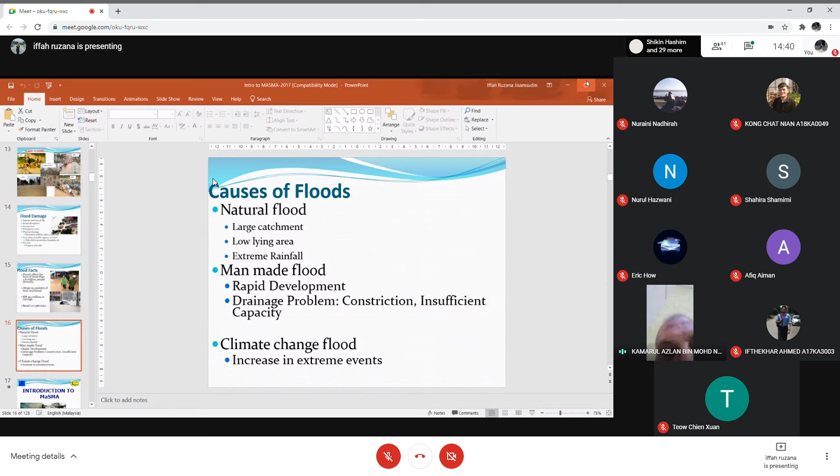Okay, so introduction to MASMA. This manual is in Malay actually. MASMA stands for Manual Saliran Mesra Alam, or environmental friendly drainage manual. Basically this manual provides guidelines on how to conduct our development so that it can be sustainable. For this class you need to refer to MASMA for your design.

For example, you need to design a temporary earth drain and the sediment basin. For all this you need to refer to this manual. You can get it from the JPS site, the Department of Irrigation and Drainage, and download it for free. It is readily available. So basically, what is MASMA? Next slide.

What is MASMA? An overview, and this is the second edition of the manual. The first manual was published in 2001 and the second edition in 2011. Ten years after the first edition, the Department of Irrigation and Drainage upgraded the manual to the second edition, improving some topics and dropping others based on feedback from users of the first edition. Next slide, please.

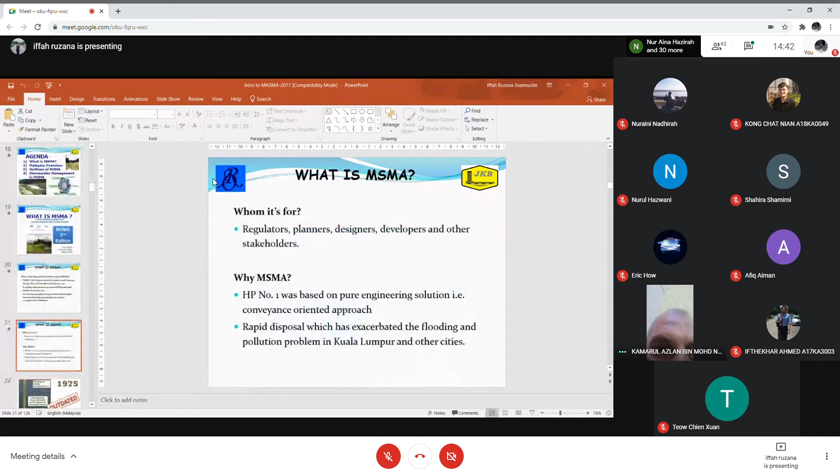So basically this new drainage manual is to replace the old manual, which is outdated because the approach is different. The previous manual's approach was based on rapid disposal and hard engineering, but the new manual is based on control at source. In the first edition, the urban stormwater management manual, the concept is control at source, whereby we try to control the problem at the site, not pass the problem to the downstream area. Next slide.

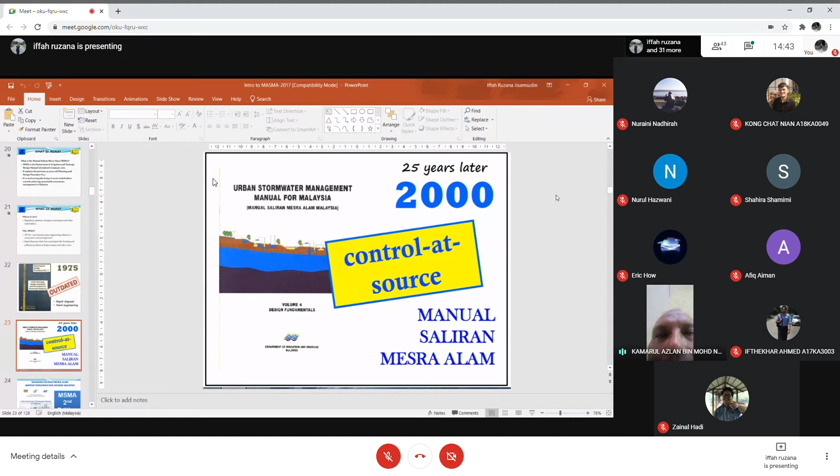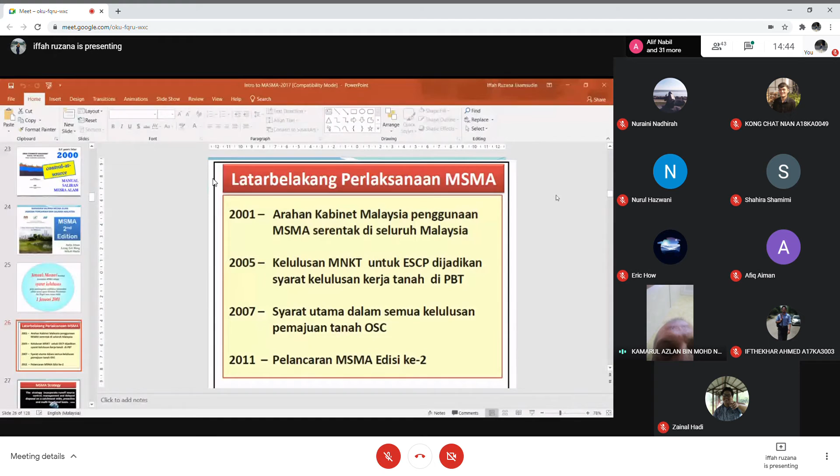This is the cover for the second edition manual. Next slide. The historical fact is that the first manual was endorsed by the minister in 2001. And then, as you can see, the second edition was launched in 2011. Next slide.

The drainage manual strategy is to incorporate surface runoff control, management and delayed disposal. So the strategy is how we can control the surface runoff, manage it and delay the disposal. For example, during a heavy storm, we store the water in a pond, and later release it gradually after the rain. So basically that is the strategy.

Okay, so we don't want to release the water as soon as possible, like in the concept in the earlier manual, the 1975 manual. That is more on rapid disposal. Okay, this should result in flood flow reduction.

So based on this strategy, we can achieve a few objectives, such as flood flow reduction, water quality improvement, so our river water becomes cleaner, and ecological enhancements. Okay, so basically we improve the water quality, and therefore the water becomes clean, and we can attract more fishes to come to our river.

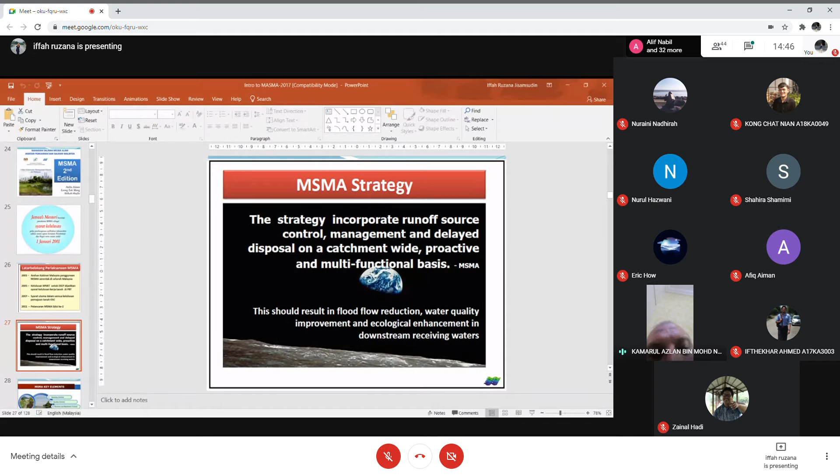But in our urban rivers, normally the fishes are not of that high quality. For example, we have this mudskipper, and other fishes that are not very expensive actually, because they're not very high quality fishes. But that is the purpose. We try to bring back this better quality, so that we can bring back the fishes into our streams and rivers. Okay, next slide, please.

Okay, there are a few key elements within MASMA, the manual. One is quantity control, the other is quality control, and the third one is erosion and sediment control. So basically, the three main components of this MASMA drainage: quantity control is to control the surface runoff. The quality control is to remove all the pollutants, such as gross pollutants, such as plastic bottles, food waste, food containers and so on from our rivers, so that our rivers can look very clean.

Okay, so if you happen to be in Malacca, you can try the river cruise. You can see the river is becoming cleaner over the years, because it used to be quite dirty, but the effort from the state government to improve the river water quality has borne fruit, and the river is quite clean nowadays, except that at certain stretches there's a bad odor. Okay, so that comes from the direct discharge from households, but that has been taken care of also.

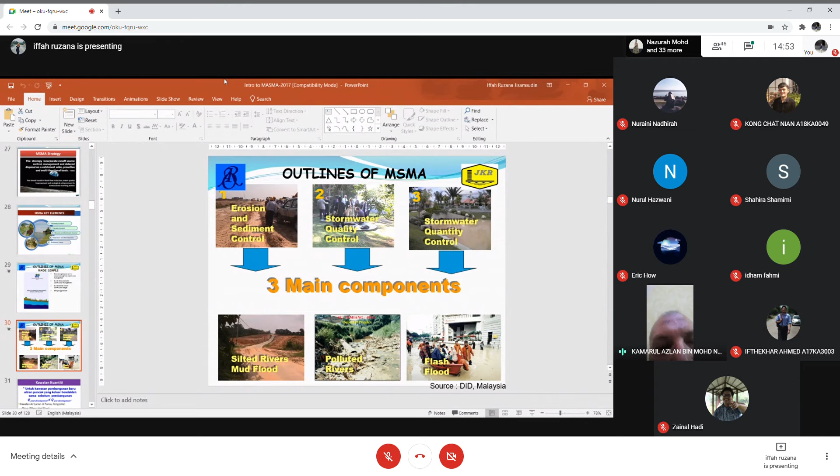Okay, that's about it. Okay, next slide. Next slide.

Okay, so as you can see, this is kawalan kualiti or quality control. So during construction, we have to propose some BMPs such as silt fence, as you can see in the lower left-hand corner. So that is the picture of a silt fence. We propose this in our construction site to prevent erosion or sediment from leaving our construction site. And then to filter out the sediment, we introduce a check dam. So the middle picture is a check dam where we gather rocks and arrange them in such a way that we can reduce the velocity and filter out the sediment.

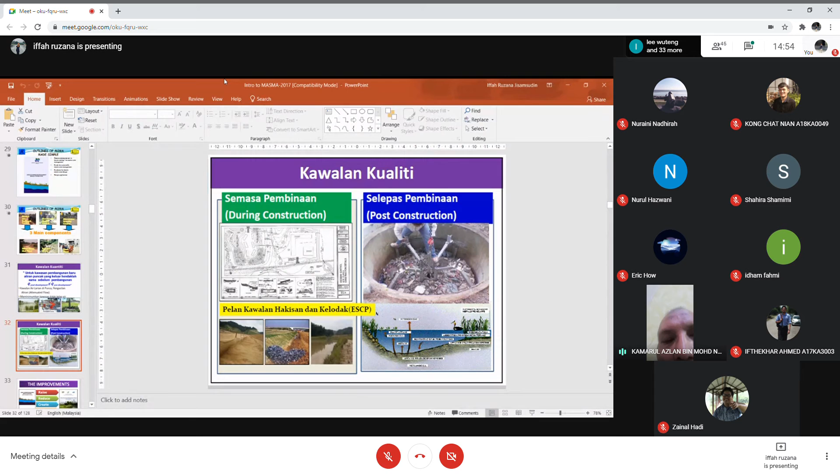And finally, the third one is the picture of a sediment basin. The purpose of this sediment basin is to filter out or to allow the eroded material to settle within the sediment basin. Okay, next slide.

Next slide, please. Okay, this is just an additional topic on the difference between the new manual and the old manual, the second edition and the first edition. Okay, just forget about it. So we finished the topic on the introduction to MASMA.

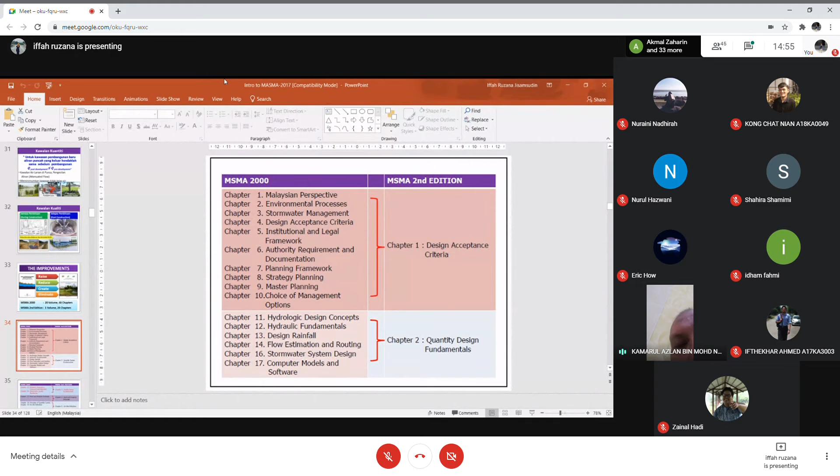Okay, okay, okay. Okay, never mind. Leave it. We go out and then we open the other slide. The other topic, soil loss slide. Okay. Okay.

Soil loss estimation. So this topic will cover the estimation of soil loss from a construction site. Okay, next slide. So basically, we have to know what is erosion and what is sedimentation, because these are the main causes of the problem. So once we identify the causes of erosion and how to prevent it, then only can we prescribe the right solution or the right medicine to our problem.

So basically, what is erosion? Erosion occurs when soil particles are displaced by raindrops, moving water, or wind. So this is basically what erosion is. Erosion occurs when the soil particles are displaced by raindrops. What happens is that when the raindrops drop on the surface of the earth, it breaks the bond between the soil particles. Why does it happen? Because there is no cover to protect the soil from erosion.

So whenever we want to do development, the first thing we will do is remove all the trees, the grass, the shrubs, the bushes, and so on. Once we remove all these, the soil is without protection, because all this while, the trees, bushes and shrubs provide protection for the soil. But once we remove them, there is no more protection to the soil.

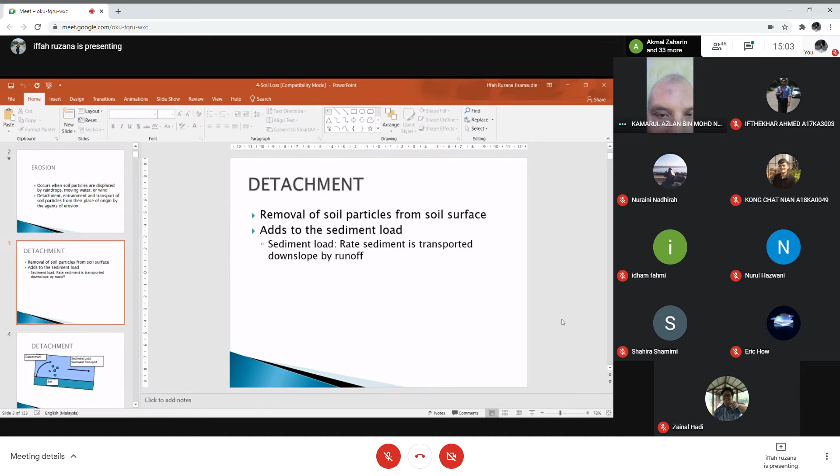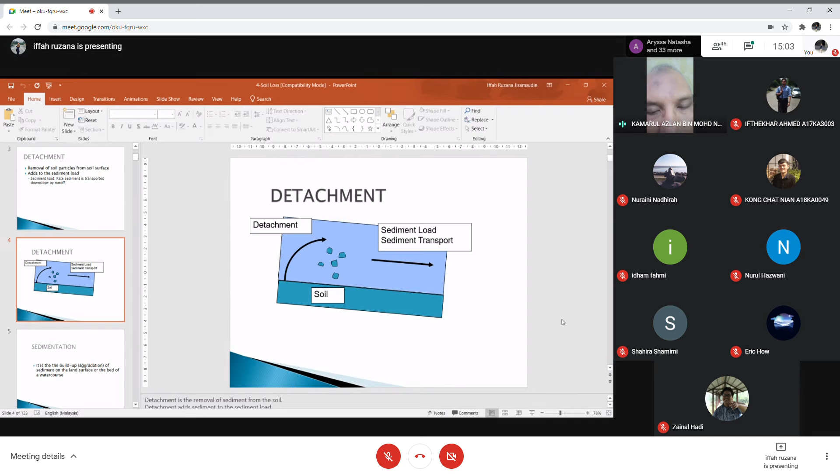So this is the graphic description of the process of detachment. Detachment is basically the loosening of the soil particle, and then the surface runoff transports it and it becomes sediment load. Next slide.

What is sedimentation? When we have erosion, then we have sedimentation, because with erosion the soil is eroded and then transported downstream. Whenever it settles down, that is what we call aggradation. Aggradation of sediment means an increase in the amount of sediment at that place due to siltation or sedimentation.

When does sedimentation happen? It happens when the transport capacity of the flow, or the velocity of the flow, becomes less, because sediment also has its density. When the density or the settling velocity is higher than the transport capacity, the sediment will be deposited at that area.

So where will this sediment be deposited? It is normally deposited when the velocity of the flow becomes very low. For example, near a check dam, in front of a culvert, in a sediment basin, and so on. Basically, it's the build-up or aggradation of sediment on the land surface or the bed of a watercourse. Next slide.

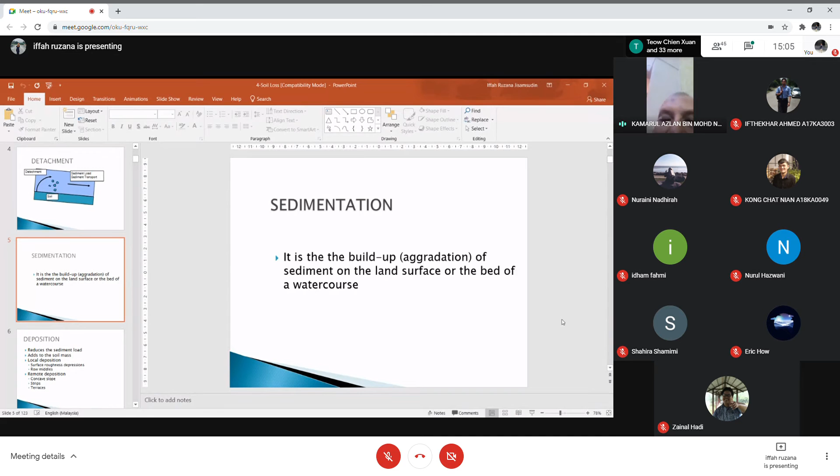Basically, deposition is when they deposit some of the material, so it reduces the sediment load. For example, whenever the material is eroded and transported, the material is not uniform. Some of these materials or the soil are quite dense, for example, sand. Sand is denser than silt or clay. So whenever the velocity reduces a little bit, this heavy material will be deposited the earliest, and then the lighter material will be deposited later when it comes

to the sediment basin or check dam, and the very light material sometimes will not be deposited, because the density of the material is less than the density of water. Therefore it cannot be deposited unless it clumps together. That's why in certain cases when we have a lot of this clay material, how can we deposit it when it is very light?

So we add some chemical coagulant to remove some of these static charges, so that allows the clay material to clump together, become bigger, and only then become denser. Then only it can be deposited. So you have to add chemicals like coagulant, polyacrylamide, and so on, to allow this clay material to clump together and be deposited. So basically, deposition adds to the soil mass.

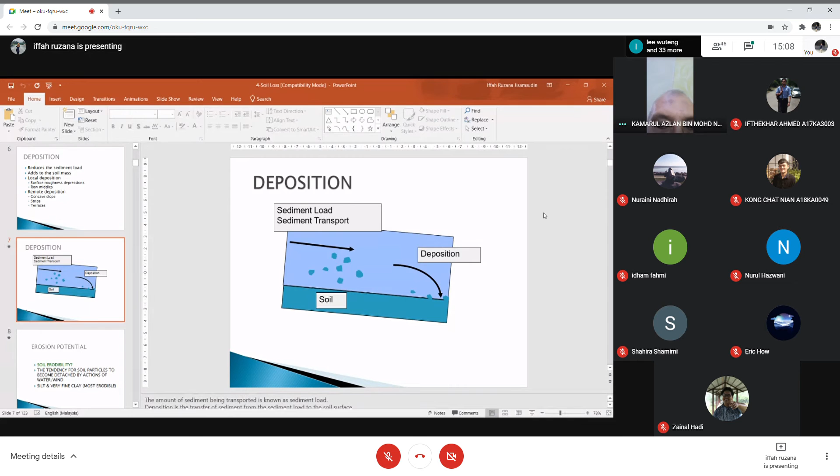What are the erosion potential? What are the factors that influence erosion rate? One of the main factors in erosion potential is soil erodibility. What does soil erodibility mean? Soil erodibility means the tendency, how easy it is for soil particles to become detached by the action of the agent of erosion. So how easily the soil can be eroded.

Of course, different types of soil will have different erodibility factors. So which one is much easier to be eroded, sand or clay material? Which one is easier to be eroded, the soil type of sand or the soil type of clay? Anyone? Sand. Salah, wrong. Clay.

As you can see, right below it, silt and very fine clay is the most erodible. So the finer the material, the easier it can be eroded. As you compare sand, which is much coarser, to clay, which is very fine, clay is a lot easier to be eroded compared to sand. Similarly, silt is somewhere in between sand and clay. Next slide.

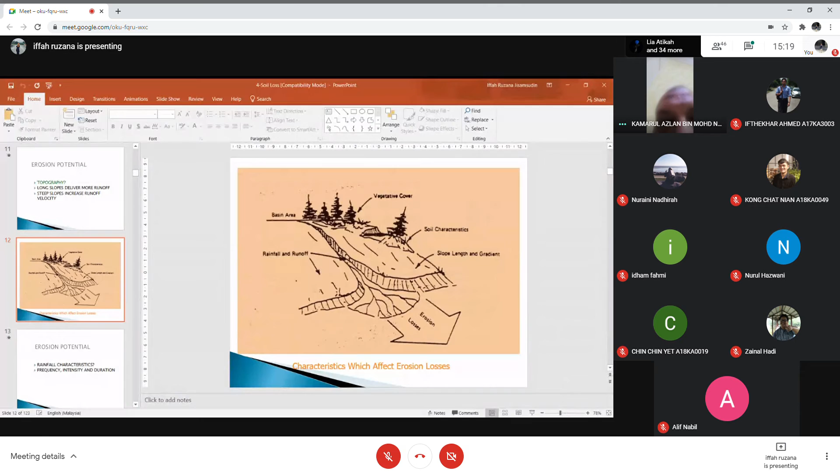Next slide. And the other parameter which can influence the rate of erosion is the erosion potential, such as rainfall characteristics. What are the rainfall characteristics? The rainfall characteristics are the frequency of the rainfall, the intensity of the rainfall, and the duration of the rainfall.

Okay, the frequency - what does it mean by frequency? What does it mean by rainfall frequency? It's the number of rainfalls that happen in a period of time - how frequent is the rainfall. In Malaysia, normally the rainfall is quite frequent during the monsoon season - almost every day we can experience rainfall. So which one will have higher erosion - frequent rainfall or less frequent rainfall?

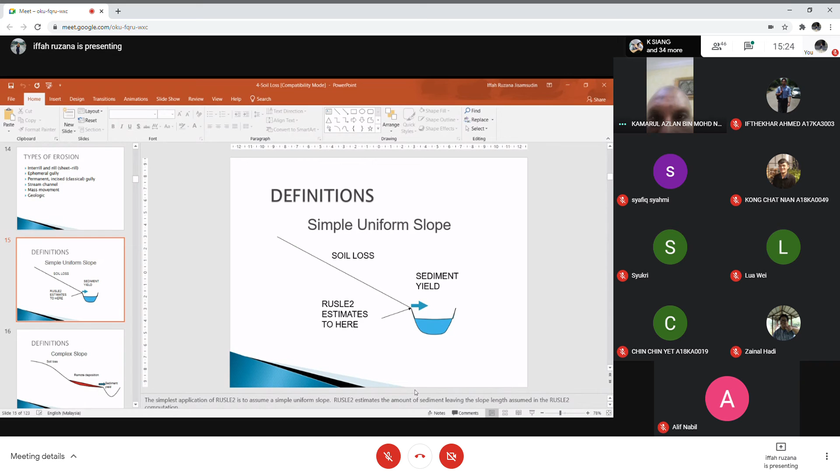This is similar, the definition for soil loss and sediment yield. Again, this is for complex slope.

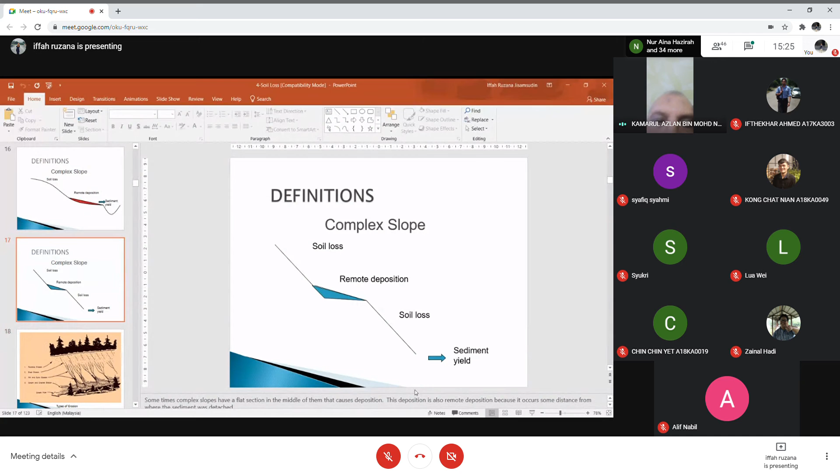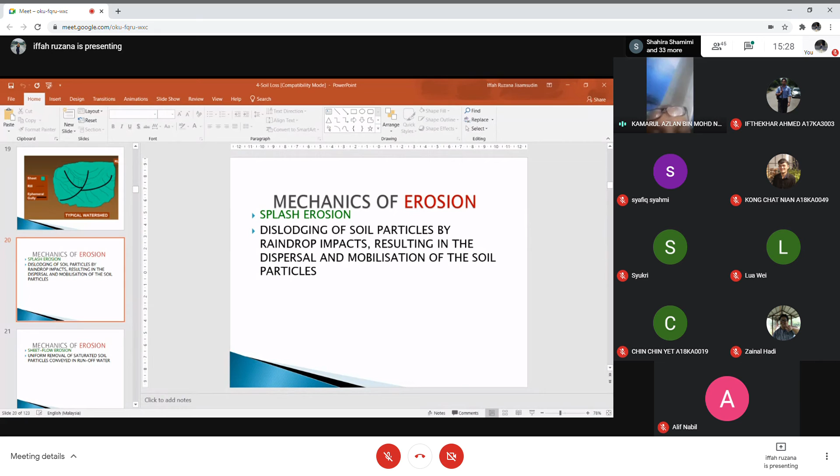The mechanics of erosion - splash erosion. What happens during splash erosion is that raindrop impact causes the soil particle to be dislodged, or breaks the bonds between soil particles, resulting in the dispersal and mobilization of the soil particle.

Sheet flow erosion is a uniform removal of saturated soil on the surface - uniform removal of saturated soil particles conveyed in the runoff water. That is what we mean by sheet flow erosion.

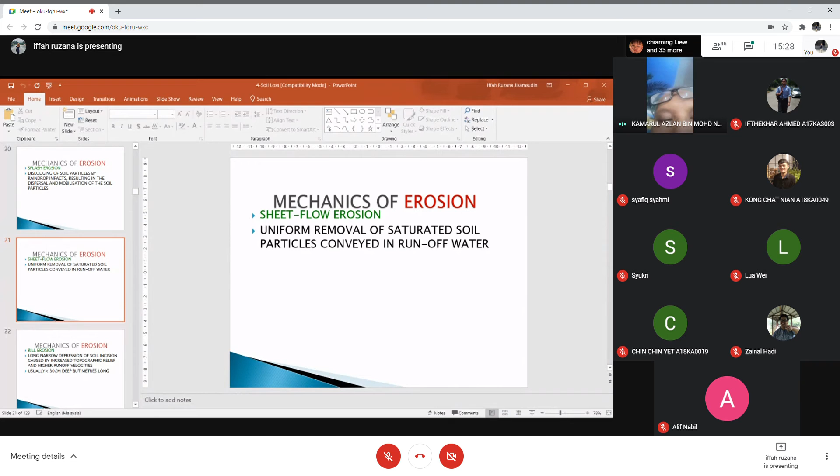Then we have rill erosion. The difference between sheet erosion and rill erosion is that rill erosion is a long, narrow depression of soil incision - just a small cut on the surface of the ground, caused by increased topographic relief and higher runoff velocity. Usually rill erosion's drain depth is less than 30 centimeters.

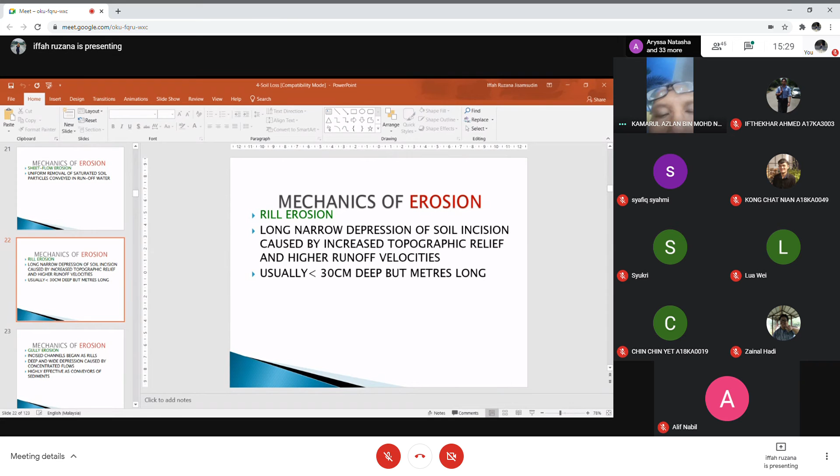Rill erosion, normally over time, becomes gully erosion - it becomes bigger. When the incision channel that begins as rill becomes bigger, wider, and deeper due to concentrated flow from surface runoff within it, it causes further erosion and becomes gully erosion, which is highly effective as a conveyor of sediments.

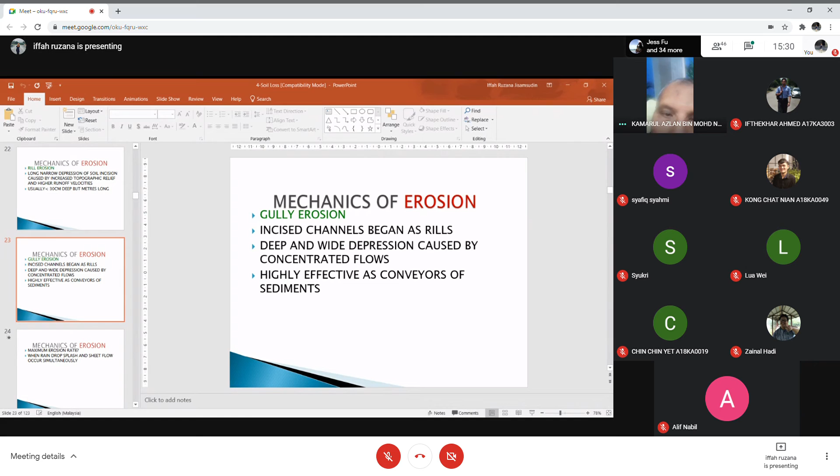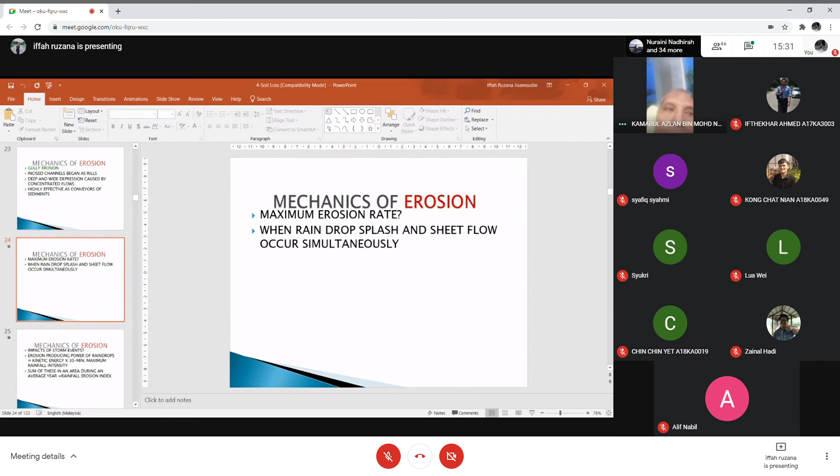Maximum erosion rate - when does it happen? Maximum erosion rate happens when raindrop splash and sheet flow occur simultaneously. So it is raining and at the same time we have surface runoff - this is when the erosion rate is at its maximum.

Okay, the impact of storm events. During a storm, splash erosion happens when raindrops impact. The erosion producing power of the raindrops is equal to the kinetic energy of the 30-minute intensity rainfall, maximum rainfall intensity. So basically, we assume that the erosion producing power of raindrops comes from the kinetic energy multiplied with the 30-minute intensity rainfall.

So what we will normally do is get the rainfall data and find the maximum 30 minutes rainfall intensity, which is the maximum rainfall intensity within the 30-minute storm.

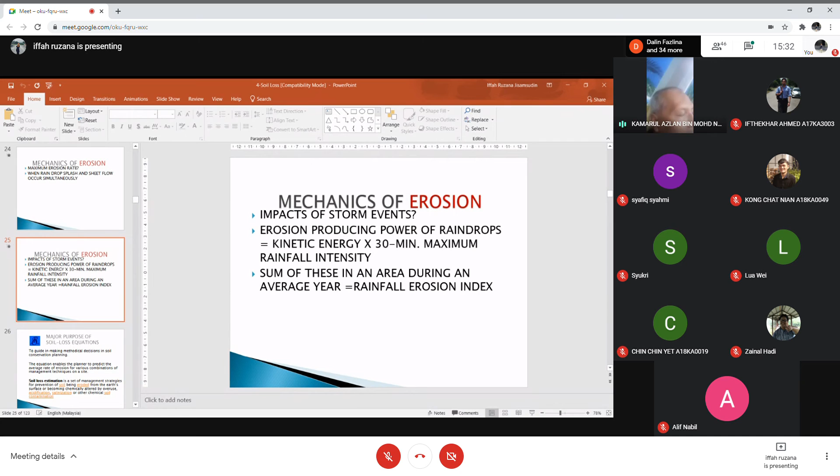Sum of this rainfall intensity in the area during an average year equals the rainfall erosion index. So rainfall erosion index is basically derived from the maximum rainfall intensity of 30 minutes within the area. Say we have 20 years of data, so we find the highest for every year and then average it out.

Why do we need to do all this soil loss estimation? There's a need to guide methodical decisions in soil conservation planning. We need to do soil conservation planning whenever we develop within a project area, so that the material is not eroded and transported outside of the site. That's why we need to estimate the erosion rate and propose mitigation to prevent erosion from happening or the eroded material from leaving the project site.

The equation enables the planner to predict the average rate of erosion for various combinations of management techniques on a site.

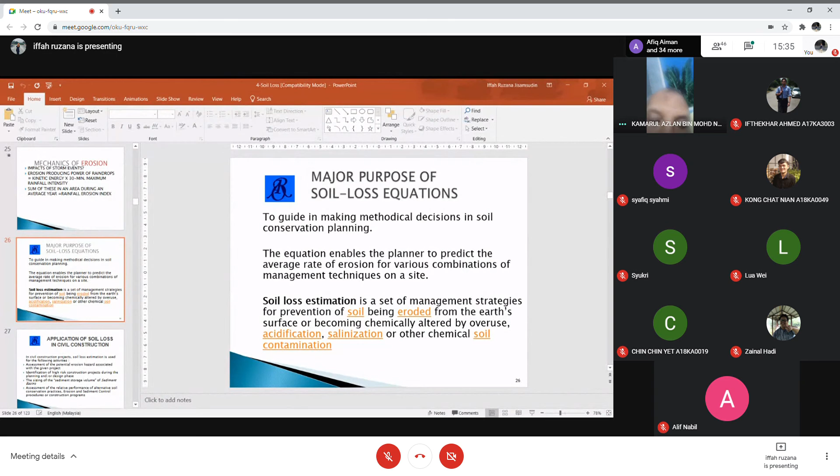Application of soil loss in civil construction. In a civil construction project, soil loss estimate is used for the following activities, in the construction site. That's what you are going to do this semester: plan the erosion control for a construction site. We will give you the construction site, and you have to plan the erosion and also the sediment control.

Assessment of the project potential erosion hazard associated with the given project. You are going to assess the potential erosion hazard - if your project area is sited within a very sensitive area. A sensitive area can mean the project site, when exposed, contains a lot of clay material that is easily eroded, or the project site is located near water bodies, rivers, lakes, and so on, which must be protected from contamination. That's why we need to assess the potential erosion hazard, whether the area is located within a very sensitive area or not.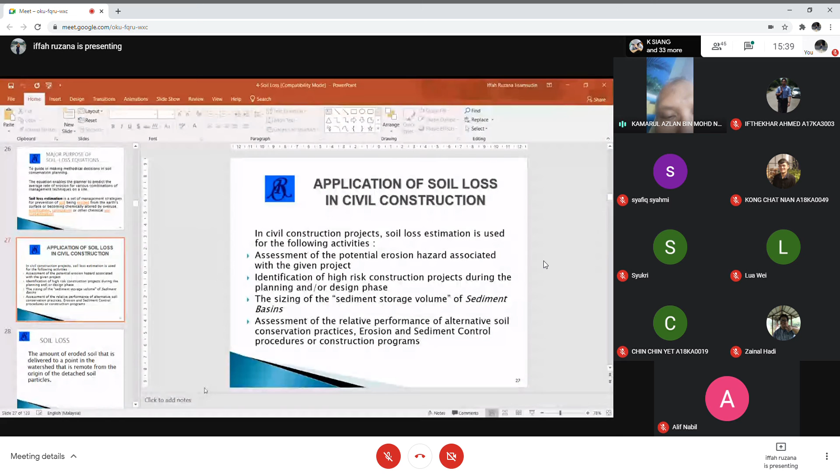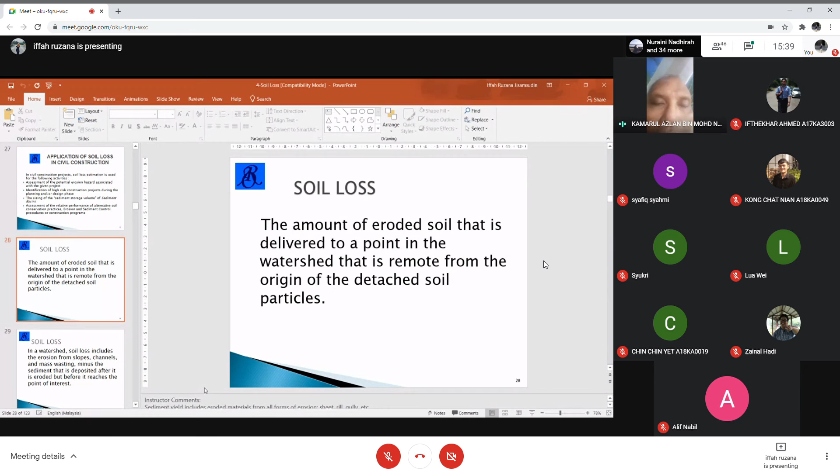What is soil loss? Soil loss is the amount of eroded soil that is delivered to a point in the watershed that is remote from the origin of the detached soil particle. So soil loss is the amount of eroded material, whether it's silt or clay, being transported to the point of interest, for example rivers, water bodies, and so on. Okay, next slide.

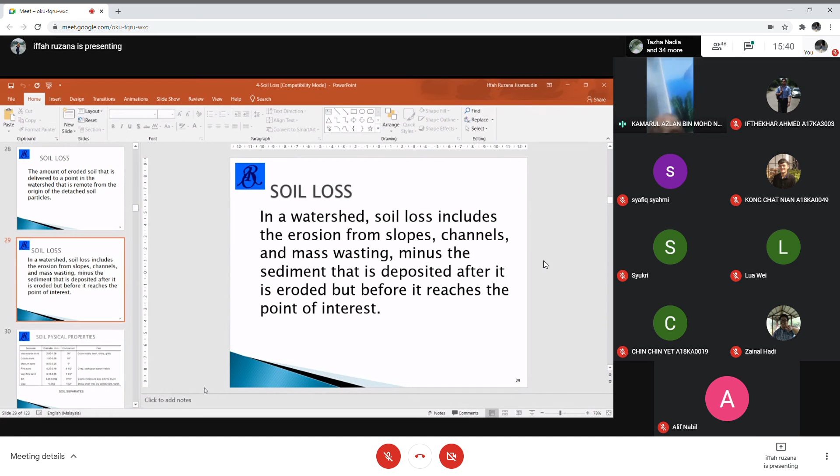In a watershed, soil loss includes the erosion from slopes, embankments, channels, mass wasting, minus the sediment that is deposited after it is eroded before it reaches the point of interest, because some of the sediment load will be deposited along the way. So basically, soil loss is the amount of eroded soil minus the deposited material. Next slide.

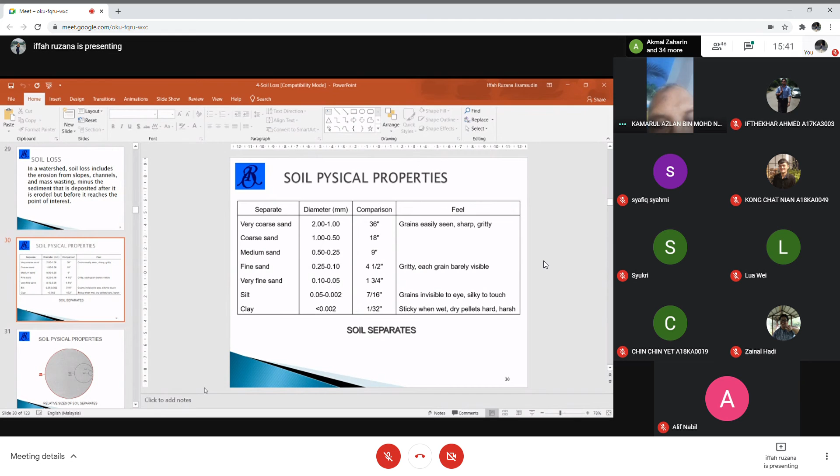Okay, soil physical properties. As we have earlier described, different types of soil have different soil erodibility factors. So we have various types of soil. We have very coarse sand, where the diameter is 1 to 2 millimeters, to fine material like clay, where the diameter is less than 0.002 millimeter, or 2 microns. These are the various sizes of the soil. We have coarse sand, medium sand, fine sand, and so on. Okay, next slide.

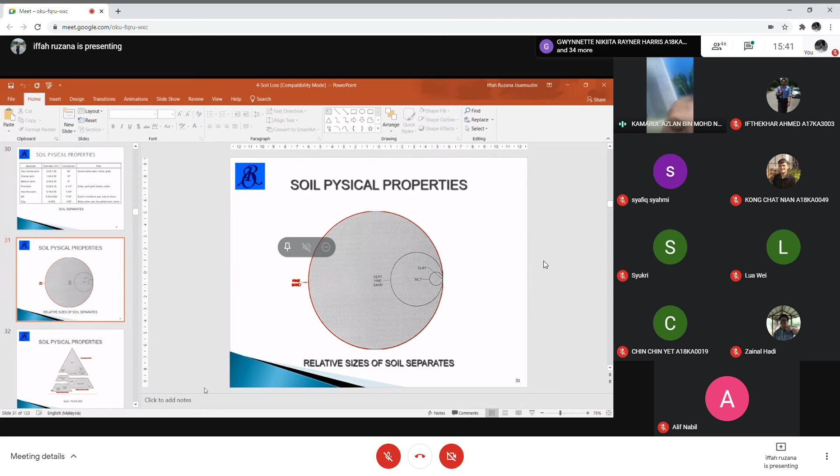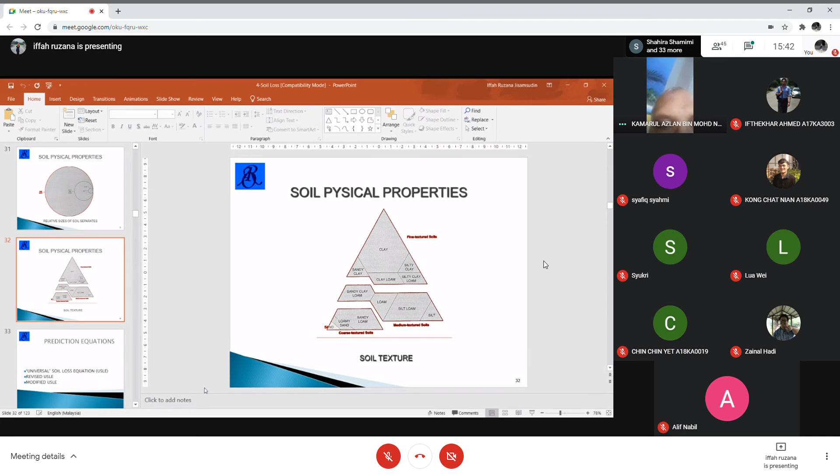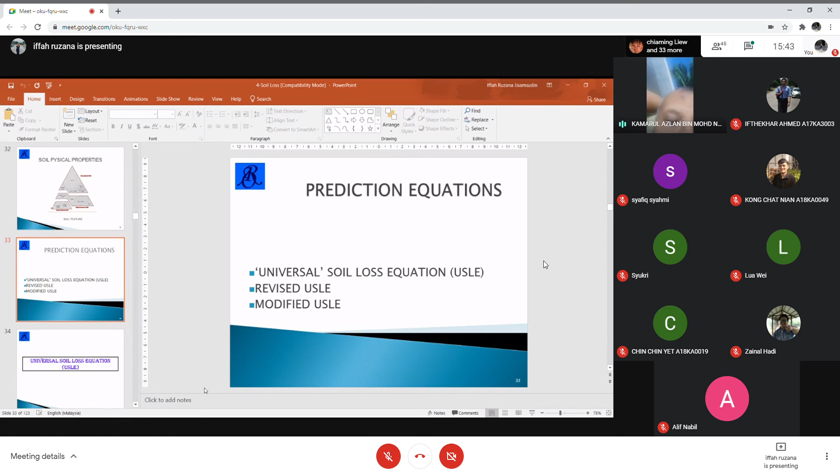Okay, the prediction equation, the universal soil loss equation. So how can we estimate the erosion rate? Normally we estimate the erosion rate using this equation. Basically in this class we are going to use the revised USLE and the modified USLE to estimate the soil loss and the sediment yield. Next slide. Universal soil loss equation, USLE. Next slide.

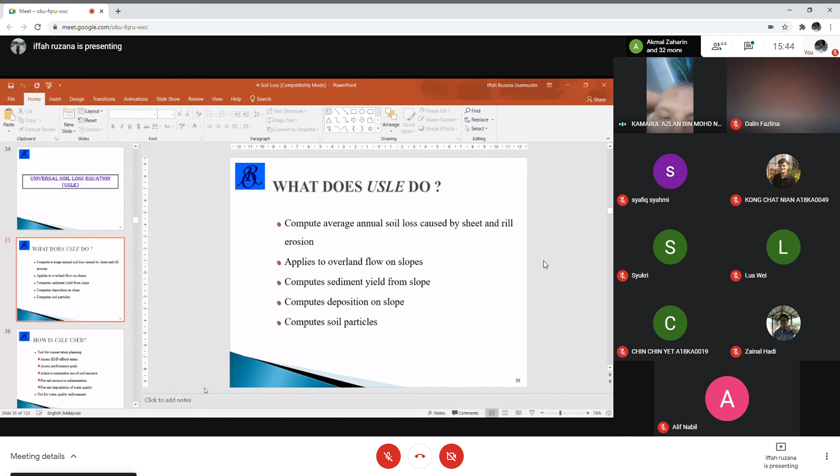So what does USLE do? USLE computes average annual soil loss. Basically, we use USLE to estimate the average annual soil loss caused by sheet and rill erosion. It applies to overland flow on slopes, computes sediment yield from slopes, computes deposition on slopes, and also computes soil particles. Okay, next slide.

Why do we use USLE? USLE is a tool for soil conservation planning. We have to conserve the soil because this soil contains nutrients that plants need to grow. If we allow the topsoil to be eroded, then the soil becomes less fertile. USLE is a tool for conservation planning to assess BMP effectiveness, whether our proposed mitigation is effective or not.

So we can use USLE to assess the performance goals. What are our performance goals in maintenance and soil conservation? Using USLE, we can assess the performance goals, and then achieve sustainable use of the soil resource, prevent excessive sedimentation, prevent degradation of water quality, and so on. But not for water quality enforcement. Okay, next slide.

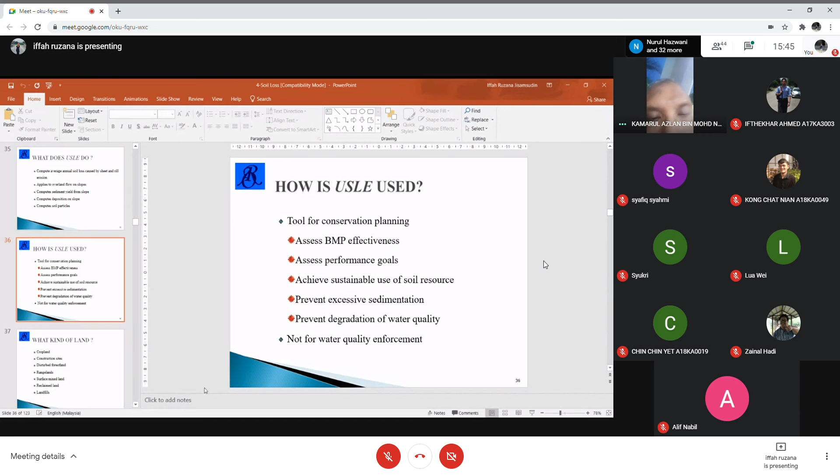What kind of land use do we use to estimate soil loss? Cropland, agricultural land, construction sites, disturbed forest land when we have logging, rangeland, surface mining, reclaimed land, landfills, and so on. These are the places where we can expect erosion happening within that area. So therefore, we can use the equation to estimate erosion from these areas. Okay, next slide.

Why is USLE widely used? Basically, it's being used all over the world. Why? Because it is very easy to understand, very easy to use, and it requires minimum resources. We don't need a lot of data. Input values are readily available. Independent of land use.

So basically the erosion rate, the symbol is A, or annual soil loss rate. A is equal to: R is the rainfall erosivity, C is the crop management factor, K is the soil erodibility, topography is slope length and slope steepness, erosion control parameters, and so on.

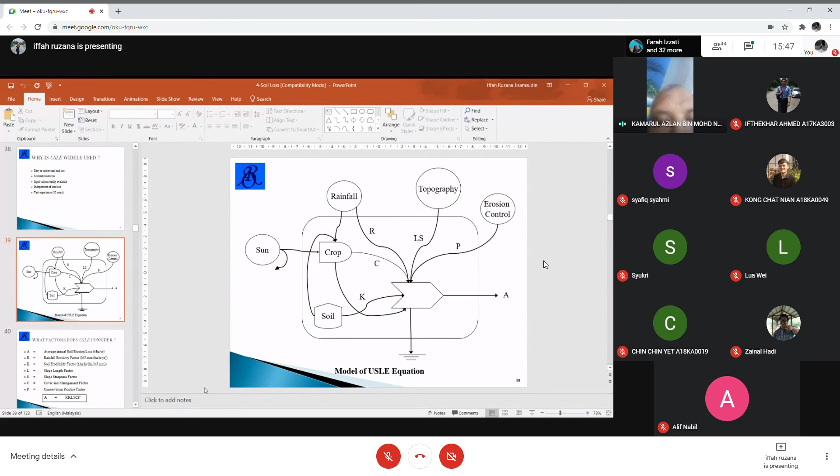So basically, A equals, next slide please, R multiplied by K, multiplied by LS, multiplied by C, multiplied by P. From there we can get the average annual soil erosion rate, and the unit is ton per hectare per year. So that is A, average annual soil loss, and the unit is ton per hectare per year.

What is R? R is the rainfall erosivity factor. How do we derive R? It is based on the rainfall erosion index, based on the 30-minute rainfall intensity. Okay, that is R, the rainfall erosivity factor.

K is the soil erodibility factor, which depends on the easiness of the soil to be dislodged or eroded. And the unit is ton hectare hour per hectare megajoule millimeter. Okay, that is soil erodibility.

And then you have L, which is the slope length factor, and S is the slope steepness factor, and combined they become the LS factor. Then you have the cover management factor C, and P is the conservation practice factor. So you multiply all that and you get the average annual erosion rate, in ton per hectare per year. Okay, next slide.

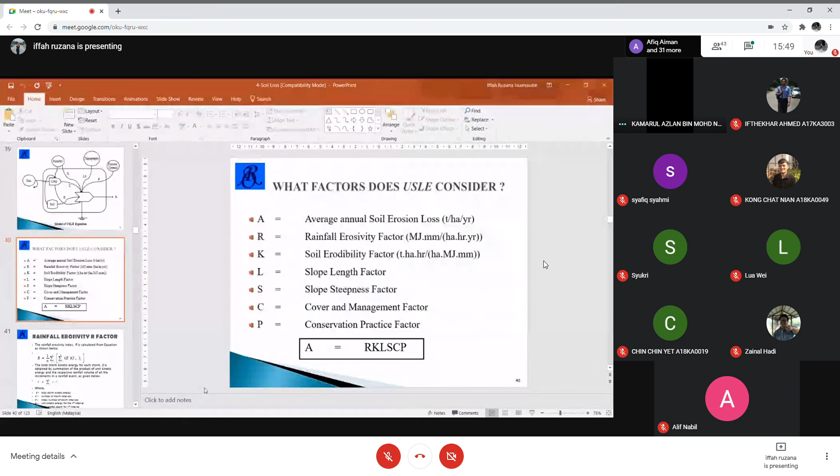Okay, so this is how we derive the rainfall erosivity factor. The rainfall erosivity index R is calculated from the equation shown below. R equals 1 over n times the summation of total storm kinetic energy multiplied by the 30-minute intensity. The total storm kinetic energy for each storm, E, is obtained by summation of the product of unit kinetic energy and the respective rainfall volume of all the increments in a rainfall event.

So that is how we get the energy E. E equals the summation of small e multiplied by V, the unit kinetic energy and the respective rainfall volume of all the increments. K is the number of storm intervals, r is the index of storm intervals, e is the unit kinetic energy for the r-th interval, V is the rainfall depth for the interval. So that is how we determine R, the rainfall erosivity factor. Okay, next slide.

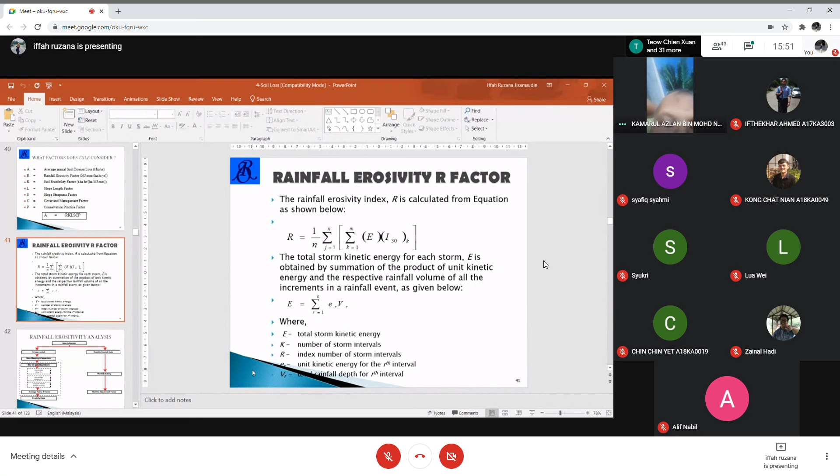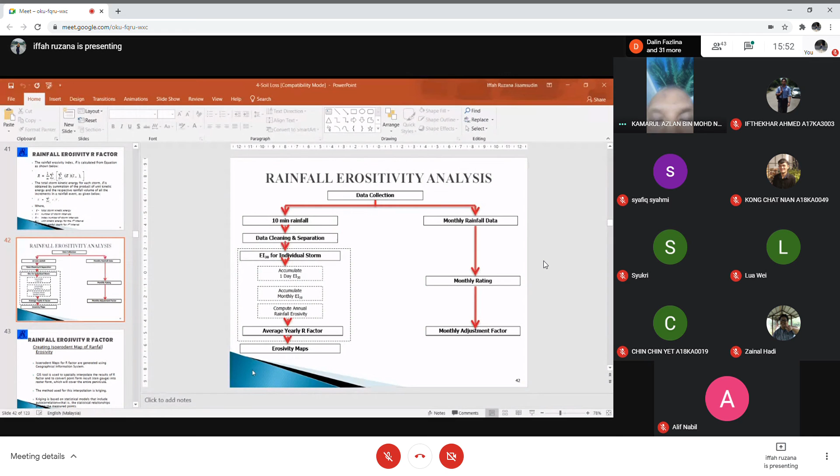This is how we derive the rainfall erosivity factor based on storm data collection. We take the storm data based on 10-minute rainfall intervals. Then we do the data cleaning and separation, and then we accumulate the 1-day EI30, then the monthly EI30, and then we come up with the annual rainfall erosivity. Based on that, we average it yearly to get the R factor. And that is what we call the rainfall erosivity factor. Okay. Next slide.

Okay, for the rainfall erosivity factor, we then come up with this map. We call it the map of rainfall erosivity. The iso-erodent map for the R factor is generated using GIS. We have many rainfall stations, and for every station we have the R.

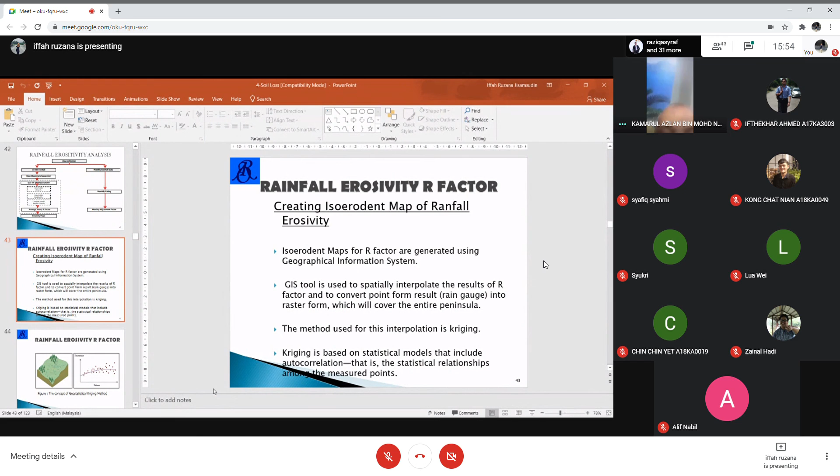Okay, this is basically the concept of the geostatistical kriging method. Based on this, when we do the interpolation for various rainfall stations, we come up with this iso-erodent map. Next.

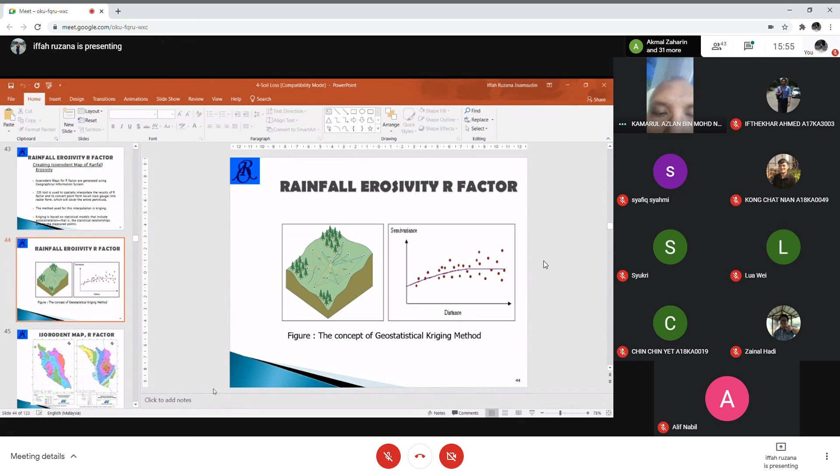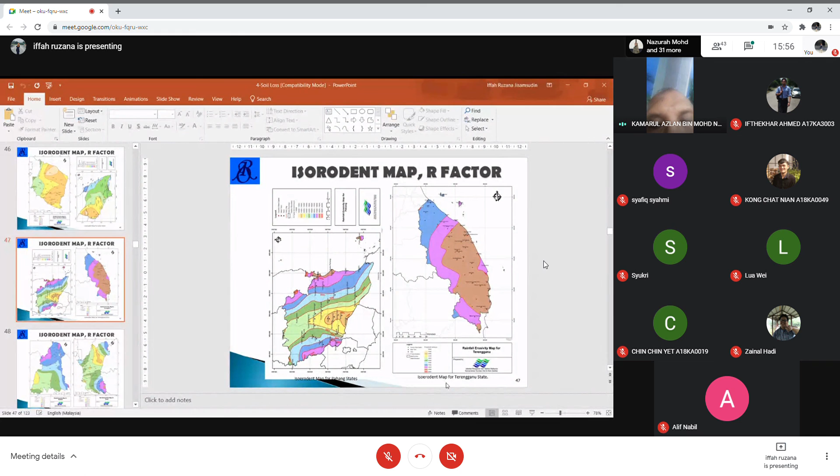And this is for Terengganu and other states, Pahang and so on. So they have already come out with this map. As a user, we can just use this map to identify the right R value for our site. Okay, next slide. And so on.

And the other parameter is the soil erodibility factor, or K. What is the K value? The K value is basically how easily the soil can be eroded. How can we determine this factor? We can determine it by using a nomograph or by using the equation. The equation is 100K equals 1.0 M to the power 1.14 and so on.

What is M? M is the soil characteristic or soil texture: how many percent silt, how many percent very fine sand, multiplied by 100% minus clay. And A is the percent of organic matter within the soil. B is the soil structure code and C is the permeability class.

All these factors can be obtained by taking soil samples at site. We take the soil sample at site, bring it to the lab and do sieve analysis, and from there we can determine our soil erodibility factor. Basically, we do it at different depths, less than 1 meter and 1.5 meter, and then average it out, because in some areas when we cut, we can cut up to 1.5 meter, so the exposed soil is 1.5 meter deep. That is why we need to do various depths and find the average value.

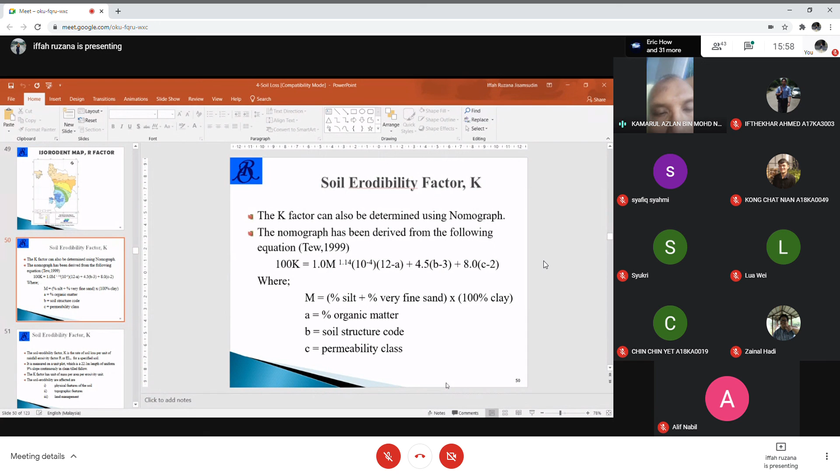And normally we do not do only one point; based on the boreholes, we can get a few points and then average it out. Okay, next slide, please.

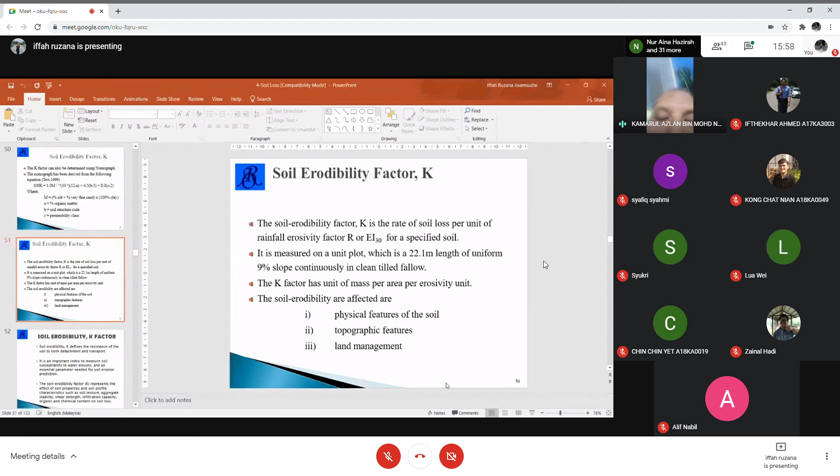The soil erodibility factor is the rate of soil loss per unit of rainfall erosivity factor, or EI30, for a specified soil. It can also be measured using a plot. Normally the plot is about 22.1 meters in length with a uniform 9% slope, continuously in clean-tilled fallow. So this is another way to determine the K value. Soil erodibility is affected by the physical features of the soil, topographic features, and so on. Okay, next slide.

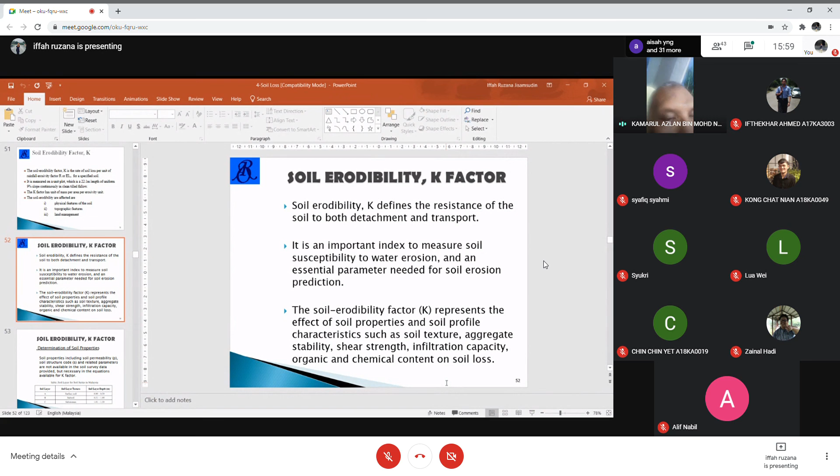Soil erodibility defines the resistance of the soil to both detachment and transport. It is an important index to measure soil susceptibility to water erosion. So it's important to determine K, because K basically is the resistance to erosion. The soil erodibility factor K represents the effect of soil properties and soil profile characteristics such as soil texture, aggregate stability, shear strength, infiltration capacity, and organic and chemical content on soil loss. Okay, next slide.

When we talk about soil layers for determining soil properties, we have different layers. Soil layer A, normally called horizon A, is the surface soil, with a depth between 0 to 0.5 meter. Soil layer B is the subsoil, 0.5 to 1 meter, and soil layer C is between 1 to 1.5 meter. Okay, next slide.

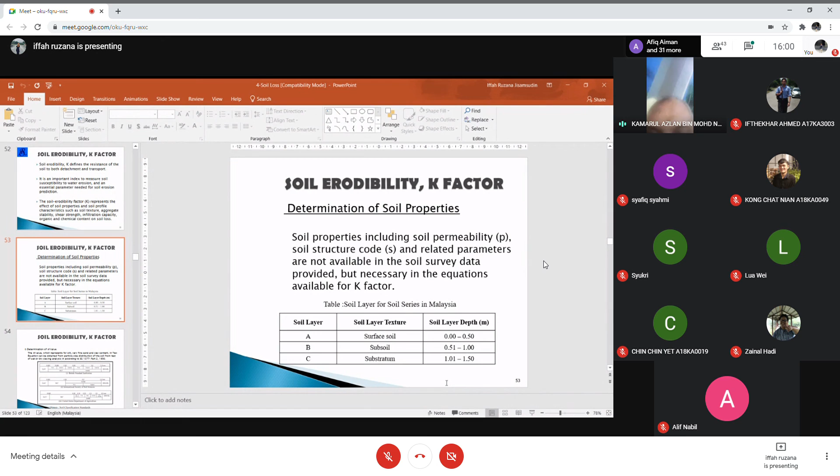The determination of the M value, which represents the very fine sand and clay content. This can be obtained from the particle size distribution. When we do the sieve analysis, we get the particle size distribution of the soil from a wet or dry sieve analysis test.